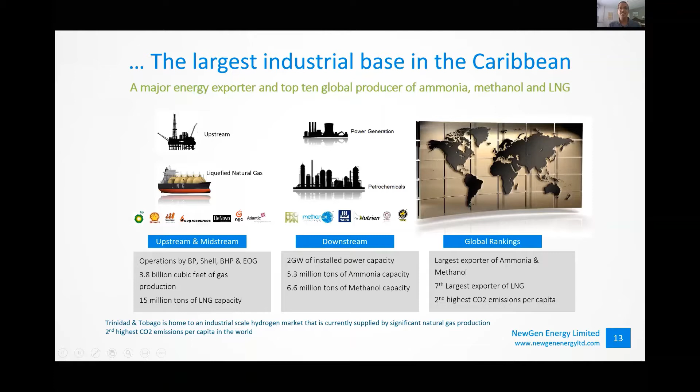So we are no slouches in this space as a country, and that makes it even more achievable for this declared future in hydrogen to be realized.

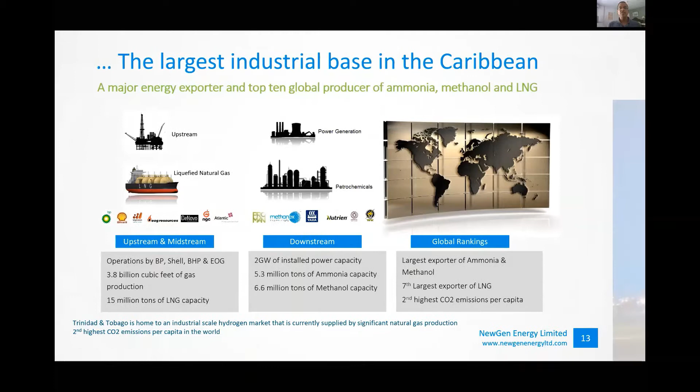The unfortunate reality exists, and this is a reality we all have to accept, that we are in a current dilemma with our energy sector as it stands, not only in Trinidad and Tobago, but throughout the world. This is the current reality that we all face, and that you will face as you emerge from UTT and enter into your career path, as something we all have to take on seriously.

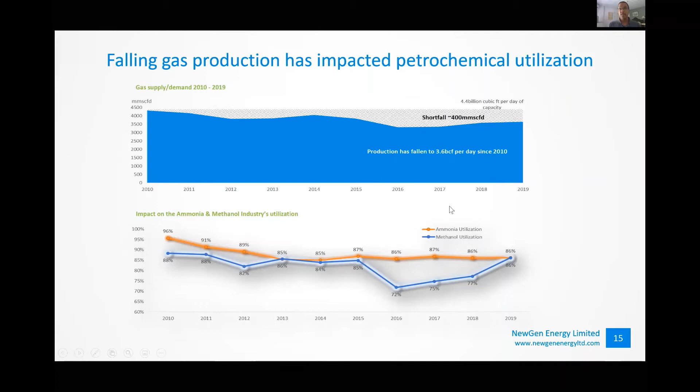We have taken a step to start filling this gap that has shown up so dramatically, which we will get to. As this slide demonstrates, since 2010, if we talk specifically to the petrochemical sector, we've been in a space of declining supply of natural gas to our ammonia and methanol plants. When you add to that the unfortunate reality of the current price structure of ammonia and methanol globally, you realize that Trinidad and Tobago is really in a challenged space, because the ammonia and methanol global commodity prices are not where they should be, and neither is the supply or amount of natural gas available. This has led to a lot of the shutterings and, in most instances, temporary closures of some of the ammonia and methanol plants, an unfortunate reality we have to face.

But as I say, with every challenge there's an opportunity. What a number of people don't recognize is that while we may be short on natural gas per se, we're actually short on the hydrogen that is derived from the natural gas. That's a very, very important revelation that we take for granted in most part. The creation of ammonia requires hydrogen, which is mixed with nitrogen from the air, and methanol as well requires hydrogen. Anthony will go into some more details as to how this all works on a chemical basis.

But what I want you to be left with is, currently, as of today, Trinidad and Tobago has a voracious appetite for hydrogen. We're talking over 2 million tons of hydrogen annually that can be consumed by the Point Lisas estate. And the challenge is that the shortfall is in the order of 400,000 tons per year of hydrogen.

An ammonia and methanol plant, as long as it's provided with hydrogen, can do what it's designed to do. And that is the big opportunity Trinidad and Tobago faces in securing an alternate source of hydrogen, which happens to be carbon neutral and from renewable sources, as Anthony will get into.

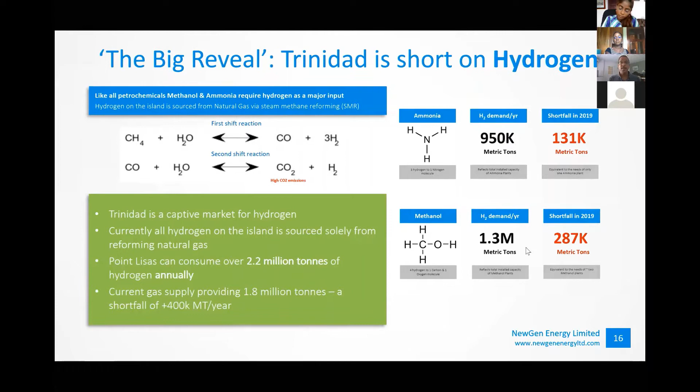My role really is to show you, on that premise, where the NewGen project fits into the space of decarbonizing Trinidad and Tobago's energy sector. I'll endeavor to do so in the next 2 or 3 slides. So bear with me. This is a current snapshot of where we are today.

On the left, you will see our natural gas supply, of which a component goes to our natural gas power plants, which provides us all with the electricity we benefit from in our homes and in industry. The petrochemical industry is now down to less than 100% of its original design supply, which correlates directly to the amount of revenue the country receives from the sale of ammonia and methanol.

So on the right, using some simple diagrammatic arrows, in 2020 compared to say 2010 or before, revenue is down. Carbon dioxide emissions are down, but I want to pause and say they're down for the wrong reasons. They're down because of the lack of production of ammonia and methanol, which generates the carbon dioxide, but that's at the detriment of our economy and of individuals' jobs and professions, and the overall well-being of life for the country. And as you can see, employment would be down.

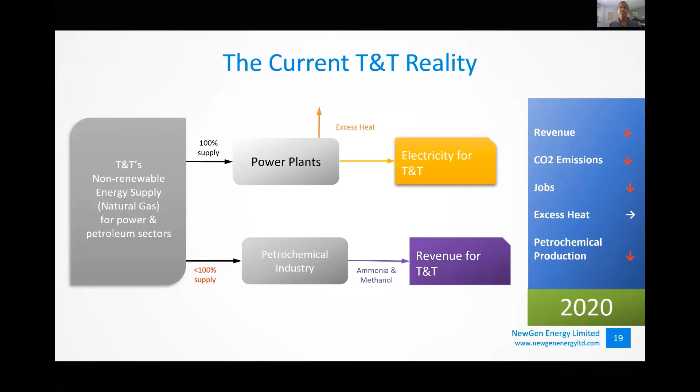We have more electricity than we know what to do with. As a result, a number of our power plants - again, Anthony will come to this - only have what are known as simple cycle power plants, which means it takes the natural gas, burns it, spins a turbine, and creates electricity. But in that act of combusting the natural gas, there is a tremendous amount of waste heat given off by the power plant.

I think we're in the space of 30 to 35% efficiency of the combustion of that natural gas. So there's a significant amount of waste heat that is simply emanated to the atmosphere. Under normal circumstances, you would apply a combined cycle or a steam turbine that would capture that heat, convert it to steam, spin another turbine, and you'd get even more electricity.

What you'll see is the NewGen project now allows for a business case to be made that if that additional electricity can be generated without burning a single extra molecule of natural gas, which is the case here, that creates what's known as carbon neutral electricity, which is as valuable to NewGen as renewable electricity - meaning coming from a solar plant, such as the Light Source BP Shell one, which we'll talk to a little bit later.

Because at the end of the day, if there's no additional carbon footprint created with the production of our hydrogen, that becomes a very valuable product known as low carbon hydrogen, which can then be converted to low carbon ammonia, which can then attract a premium on the international market because of its lower carbon footprint. And Anthony will take a deeper dive on that.

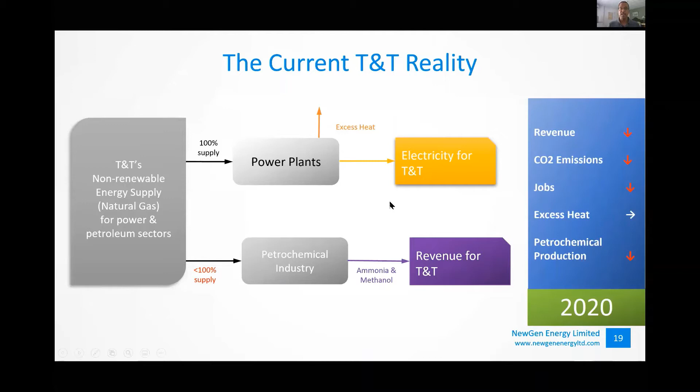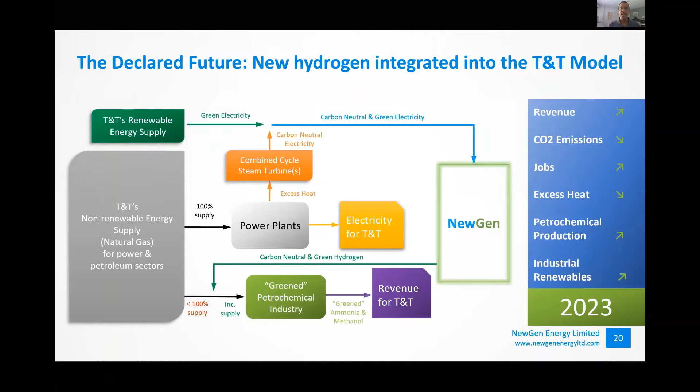So this is what NewGen is in service of. This is our declared future, which I think I've essentially talked through, where NewGen will acquire the combined cycle electricity generated from a new steam turbine, combine that with the green electricity from the solar facility proposed by Light Source BP, and take that carbon neutral and green electricity and convert it to hydrogen, the manner which Anthony will talk through, the form of electrolysis of water.

We take that carbon neutral and green hydrogen and we use it to supplement and complement the existing natural gas supply that is provided to our petrochemical industry.

So not only are we adding an additional source of hydrogen to our starving petrochemical industry, we're also adding that hydrogen in a carbon neutral manner. By definition, that starts the journey of greening our petrochemical industry, creating greened ammonia products, which will ultimately attract a higher commodity price compared to traditional gray ammonia made around the world. This is the declared future we are in service of, and we're going to do our best to start delivering on this in 2023, if everything goes according to plan.

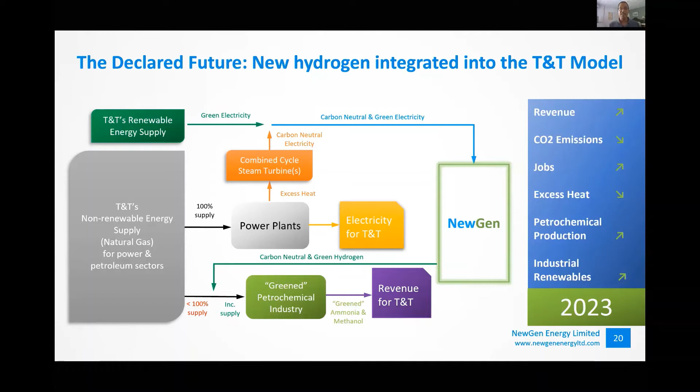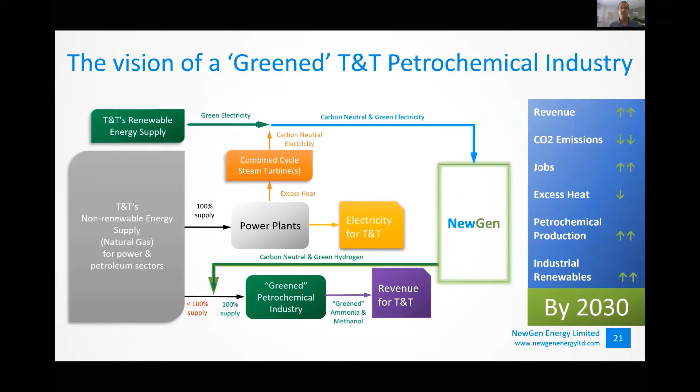What I encourage everyone on this call to be in service of is building out from that initial step, embracing the concept of a fully greened Trinidad and Tobago petrochemical industry, where we create more carbon neutral green electricity and hydrogen, so that ultimately we get our existing ammonia and methanol plants back up to nameplate capacity, generating more revenue than before, while enabling a renewable supported energy sector of Trinidad and Tobago in a material way.

So I'd like to conclude by answering the question, what really is NewGen's true role in all of this? Our role is to start, so that you can help realize this new future for Trinidad and Tobago - a new low carbon future that includes green hydrogen, green ammonia, green methanol, biofuels, and waste to energy. We can be a front runner in global research and development in many of these emerging spaces. We can convert our fabrication and construction industry to support a renewable-based future, and much more to come. We may be blazing this one trail, but it's in service of you being the energy pioneers of tomorrow, because that's what it will take to sustain and expand the energy sector of Trinidad and Tobago that we currently have, with your support and pioneering contribution.

So ladies and gentlemen, I'd like to end by saying the next energy revolution begins today. I thank you.

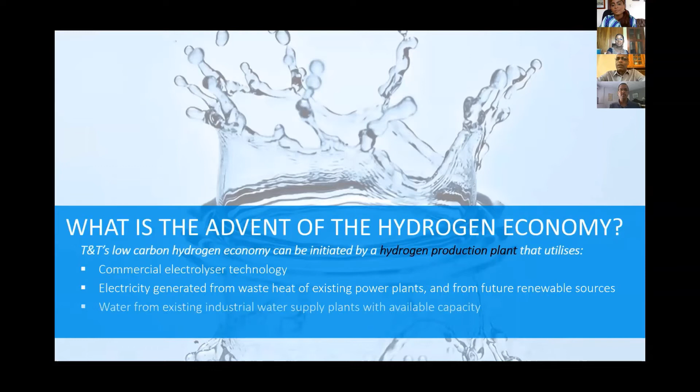Okay, so we've heard, I would imagine, comments on the hydrogen economy. There's a lot out there in terms of news about developments in that regard.

Looking specifically at Trinidad and Tobago, we can really achieve that intent through hydrogen production, which, unlike the existing steam methane reforming that predominates the entire energy sector in Point Lisas, go towards commercial electrolyzer technology, utilizing an existing electricity generation capability from power plants that we have now, but which is not utilized because you require a combined cycle, so that this waste heat that Philip would have mentioned as exhausting from the gas turbines

can be applied to steam generation, which is then used to drive conventional steam turbines to produce additional electricity. Of course, the feedstock for producing the hydrogen is water, and I believe many of you would be familiar with the idea of electrolysis from your early school training, for those involved in sciences. The idea of using electrolysis to separate hydrogen and oxygen from water has been around for quite a while.

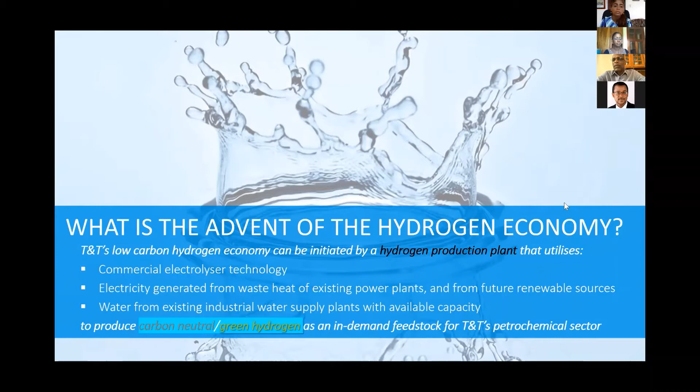So how do we currently produce hydrogen? The basic reactions involved in producing hydrogen, whether for a methanol plant or an ammonia plant, start with natural gas. You don't see natural gas in the equation because largely natural gas comprises methane, and that is the molecule converted into hydrogen in steam methane reforming. The reactions involve the oxidation of the carbon atoms into carbon monoxide first, which releases a significant quantity of hydrogen, followed by the carbon monoxide itself being further oxidized into carbon dioxide, and the water in the process again becomes converted into hydrogen.

These reactions are referred to as shift reactions, the former being primary and secondary reactions. So essentially, the goal of producing the hydrogen, as previously mentioned, is in fact to produce in the end ammonia and methanol.

By virtue of a reaction between nitrogen from the air and the hydrogen, we get ammonia. And in the case of methanol, it involves the addition of carbon monoxide or carbon dioxide into the feedstock, and that combination then allows the production of methanol, which is an alcohol, CH3OH.

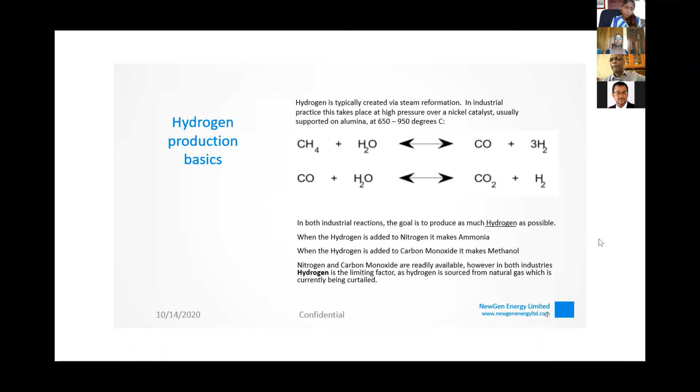Now, there are many concerns by the uninformed as to hydrogen safety, and a lot of it is driven by perhaps familiarity with an incident that happened back in 1937 when an air balloon caught fire and there were fatalities as a result, and it was thought there was a hydrogen explosion. More recent information suggests that in fact it was the paint on the exterior of the fabric used in the air balloon that was ignited by static electricity during a storm, and that what was burning was not the hydrogen.

So this idea of hydrogen as a dangerous, explosive chemical really is not factual. In addition, some people confuse the idea of the hydrogen bomb with chemical hydrogen. The reactions involved in the hydrogen bomb are nuclear reactions, and to get to what is considered hydrogen fusion, you need first to have a fission reaction, a nuclear fission reaction, to generate the millions of degrees of temperature required to initiate hydrogen fusion.

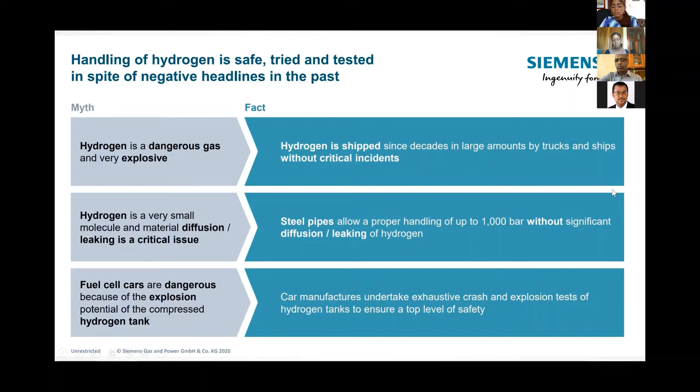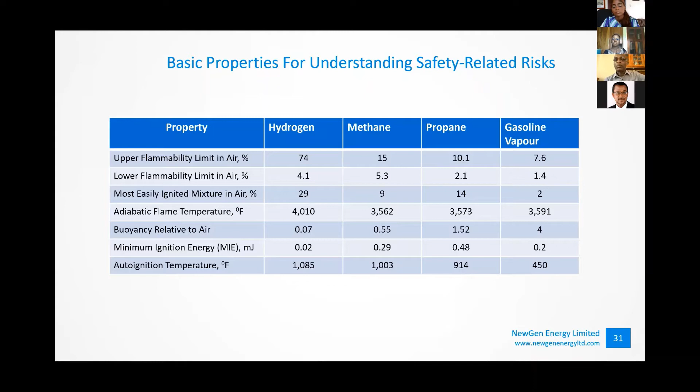Yes. So let's talk about how these properties may influence hydrogen safety. As compared with what we know in terms of fossil fuels, it is 14 times lighter than air, so it means it disperses quickly. Both gasoline and propane are heavier than air, they pool to ground level. The flames emit a lower radiant energy, so it's less likely to spread to surrounding areas in the case of a fire. There's no toxicity and no environmental concerns about contamination.

It's less combustible than gasoline. Think about that. It is less combustible. Gasoline is 2 to 3 times more flammable in air than hydrogen. And we handle gasoline very frequently. Many of us fill up at the gas stations, and while we do that, we smell gasoline vapors. We never think that, listen, this thing is actually more flammable than hydrogen would be.

It has a relatively low energy density compared to other fuels, and in other words, burning hydrogen does not produce as much heat as those others. And the reason being, of course, is that it has no carbon. In combustion, carbon plays a big role in the amount of energy released. Okay, so the one thing we need to be aware of, it has a wide explosive range, and we saw that before. Mixtures ranging from 4 to 75% in air can still ignite.

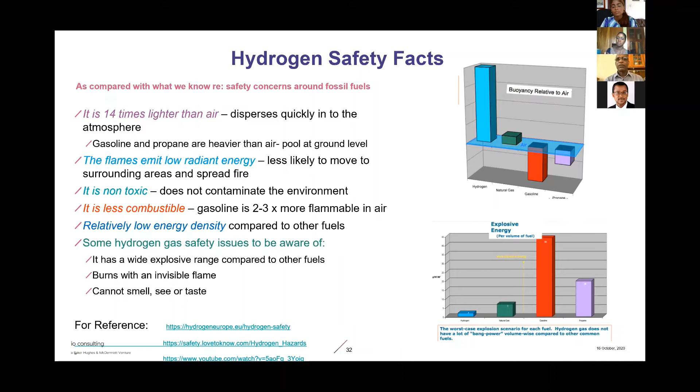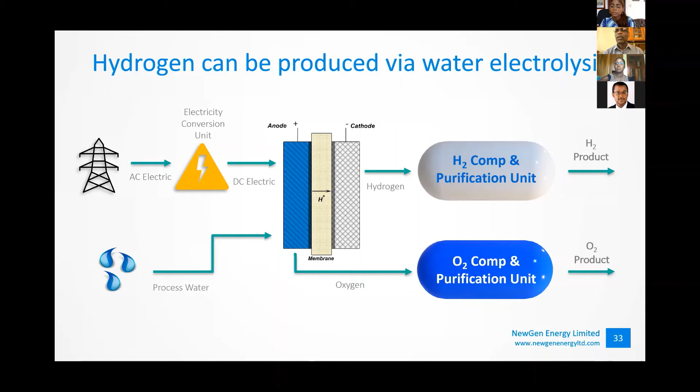Okay, so there are various electrolyzer technologies, and perhaps the one we may be most familiar with, if not in depiction, certainly knowledge of it, is the alkaline electrolysis cells, AEC. And in these ones, there's a solution, an electrolyte, and then you have the electrodes. And by virtue of the electrochemical forces, you have migration of the ions to cathode and anode, and the subsequent release of hydrogen and oxygen from the electrolyzer.

The PEM, and that is proton exchange membrane, works with a membrane in lieu of these solutions. Similarly, you have an anode and a cathode. You have a point of entry for the water. And again, the oxygen and hydrogen are released at the specific electrodes. Solid oxide electrolysis cells is another technology. And in these, again, you don't have a solution.

Now, there are pros and cons of each technology. And the most mature, of course, is the alkaline electrolysis cells. That, of course, should not surprise us. We know about electrolysis in chemistry labs and so on. There's always some electrolytic liquid involved in that. There are lower costs associated because you don't have to have noble metals in the electrodes themselves. And again, because they can be large, the economies of scale drive the cost down.

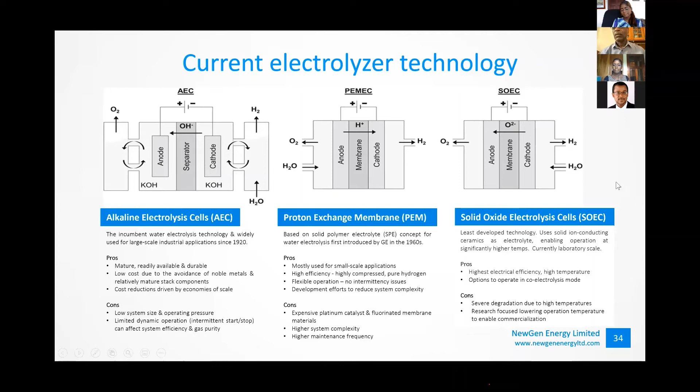Next slide, please. Yeah.

So if we look at the whole idea of utilizing low carbon electricity, it doesn't end necessarily with the production of hydrogen. Apart from reducing the CO2 footprint by generating hydrogen through electrolysis, you can also go beyond. Now, again, the purpose of producing hydrogen is in fact to make something else, typically ammonia and methanol.

In this slide, we show that we can produce ammonia, the same as green ammonia, if we were to combine the output of an electrolyzer and a nitrogen separation plant, which starts with air, produces nitrogen. So we now have the ingredients to make ammonia without any carbon footprint. And of course, this is a required chemical for agricultural purposes, and in the face of increasing global population, there's no scenario in which the demand for fertilizer is going to be reduced.

Just to give an example, by approaching the manufacture of ammonia in this way, you could have over 40 million tons just in Europe alone as a reduction. And globally, it will amount to 360 million tons. So, of course, this is the future. And you as young people should be part of that journey.

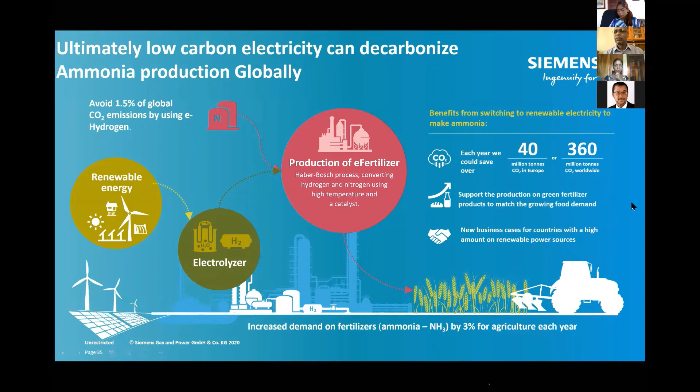Next slide, please. Yeah.

Okay, so now let's take a look at, from that global perspective, what can we on this end do to eventually realize our contribution in that regard? And this really speaks to the value chain of our project. Essentially, T&TEC will be the one to distribute the power.

That power itself originates from the solar facility, which will be green, and potentially from our existing power plants, which have either unutilized secondary power, or may have to put in the means of capturing that waste heat and converting it into power through combined cycle.

So that power arriving at the NewGen facility will allow the production of hydrogen, which will initially be marketed. And we're talking about green hydrogen being distributed to plants in Point Lisas. Initially, we are going to start with the Yara plant, and then consider others as we grow our footprint,

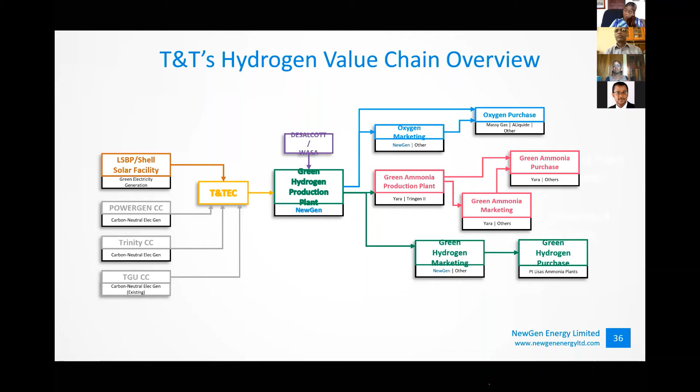Okay, so let's get into a little bit more of the NewGen project. What exactly will that involve? So it is planned on the basis of providing 27,200 metric tons of hydrogen to the off-taker. This would be equivalent to about a quarter of the typical hydrogen requirements of an ammonia plant in Point Lisas. They don't all have the same capacities, but particularly referencing them to the later vintage of plants, which can produce up to 1850 metric tons per day.

The capital cost estimate is expected to range between 300 and 400 million US dollars, and the electricity consumption will be in the ballpark of 170 to 200 megawatts. Water consumption, that is the feedstock, will be about 240,000 gallons per day, which is, in terms of the overall water supply in the country, just 0.1%.

But I think more importantly, this quantity of water is about the same that would be required to produce hydrogen through steam methane reforming. So we're not going to be adding in terms of water demand. It means simply that water which would have gone into the process anyway to produce hydrogen by steam methane reforming will now be utilized to produce hydrogen by electricity. Next slide, please.

Okay, so beyond the depiction on the previous slide, the project description could be considered in some blocks here. We have the main process, which essentially is the electricity conversion unit, the electrolyzers themselves, and the product streams of hydrogen and oxygen being compressed and purified as required. These could be considered to be the inside battery limits, which means that there is supporting infrastructure required to allow this. As we said, the feedstock is water, and the water needs to be purified to a higher degree before it can be utilized in this way.

And the treatment facilities associated with that would be part of the offsites. In addition, you need to have cooling water systems, plant air so you can run instruments, nitrogen for blanketing and purging purposes, and so forth. So all of these would constitute part of the outside battery limits equipment. Of course, there has to be infrastructure, roads to provide access to the site, administration building for offices, control room, laboratory, all of the facilities we would expect with a petrochemical plant.

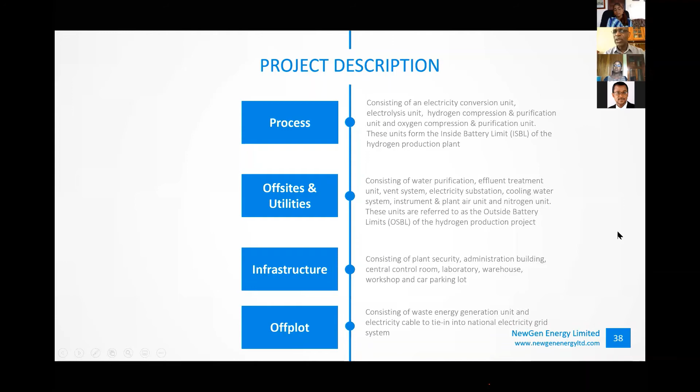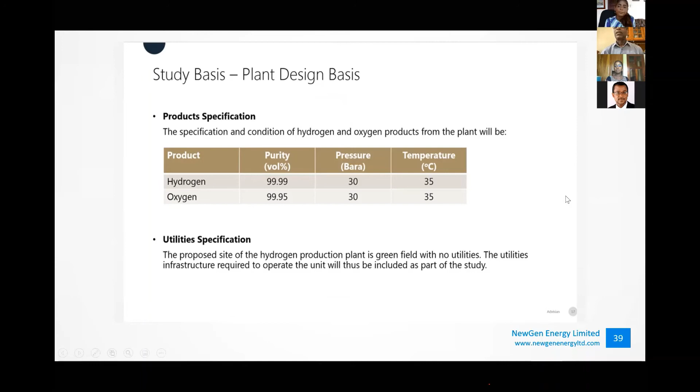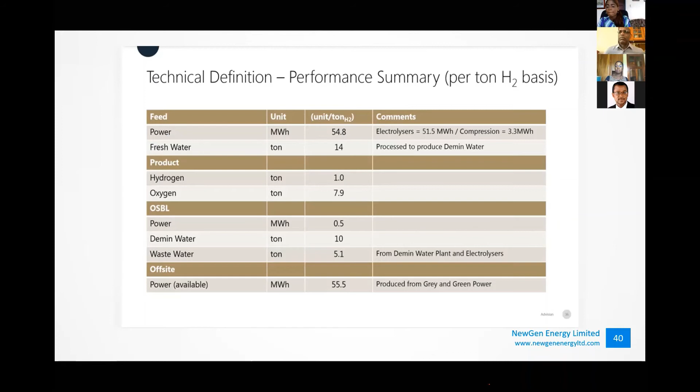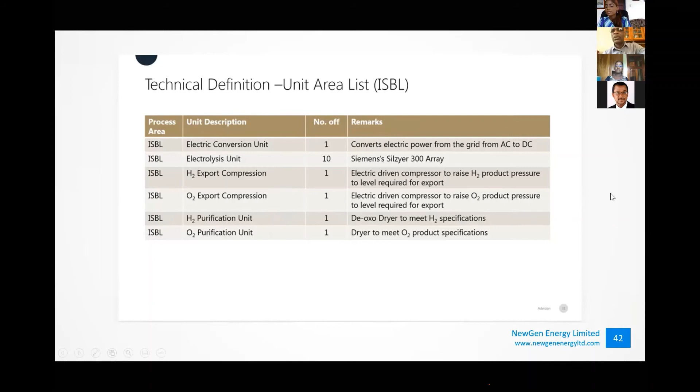Okay, I'm gonna go a bit faster now. I realize that the time has crept up. Okay, so this here just talks about some of the components that will constitute the equipment for the plant. And we kind of spoke to it before, so essentially we could just gloss over this. Let's take the next slide, please.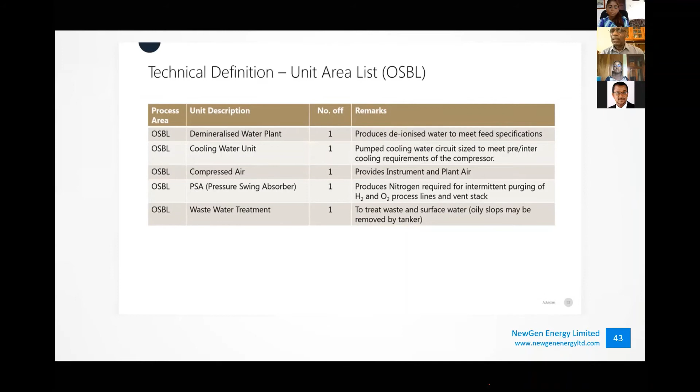Right, so again, you need some kind of purification system. So that's the demin plant. You have cooling, compressed air. This PSA here is a means of improving the quality of the hydrogen, and that essentially works on the basis of it absorbs the hydrogen and depressures it so that you catch the components you want to get rid of in the solid bed, and a purified stream is released.

Okay, next slide, please. Okay, I didn't realize I was right there. Okay, so that's it, and thank you very much for your attention. I'll pass it back over to Mr.